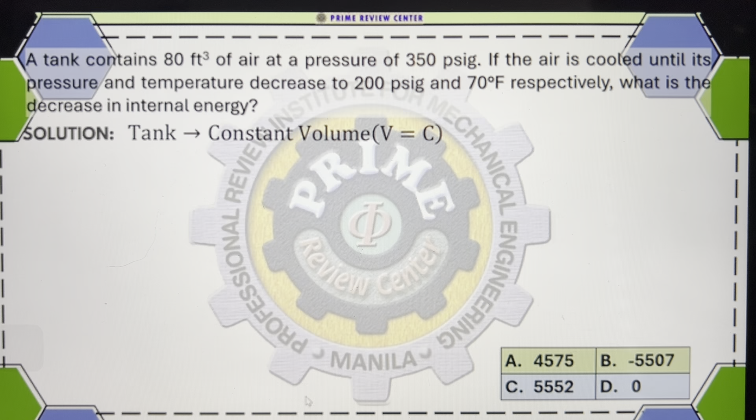So we need to find the decrease in the internal energy. How are we going to solve this? Let's recall our vessel. We have a tank, and since it's a tank, we can consider that as already a constant volume, right? If volume is constant, notice the problem gives two pressures and one temperature. Actually, the internal energy for a particular gas needs two temperatures to solve. So since only one temperature is given, along with another set of pressures, we can use the combined gas law to solve for the other temperature.

The combined gas law is P1V1 over T1 equals P2V2 over T2. Now since our system has constant volume, V1 and V2 cancel out, simplifying it to P1 over T1 equals P2 over T2, which is Charles's law.

So pressure is 350, which is gauge. The Charles's law formula needs absolute pressure, so we add 14.7. Similarly for the 200, divided by T1. Let's convert to Rankine, meaning we add 460. Then for T2, which is 70, we do the same, add 460.

So when we solve this, temperature 1 will already be in Fahrenheit, adding 460. Let's plug it in: we have 350 plus 14.7, divided by X plus 460. For all problems involving absolute temperature, it's not necessary to manually add the factor each time — for example here the 460 is just to make it absolute. When you shift-solve, you can just use X directly.

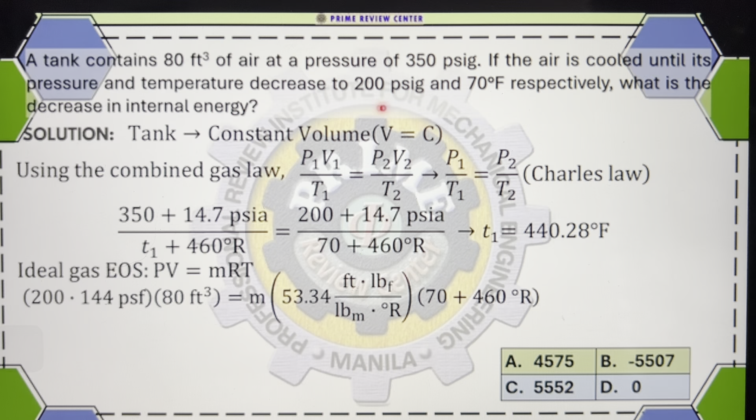So we need to find the mass. Our pressure is 200 psig, so we make it absolute — that should be plus 14.7. Since 200 psig is gauge, we convert it to absolute by adding 14.7.

So we have this times 144 to convert square inches to square feet. When you multiply PSI by 144, it automatically becomes pound per square foot, PSF. Times volume, that's 80 cubic feet, which cancels out our square foot. Then that's equivalent to mass times R, which is 53.34 for air, canceling out foot-pound — the foot and pound cancel out.

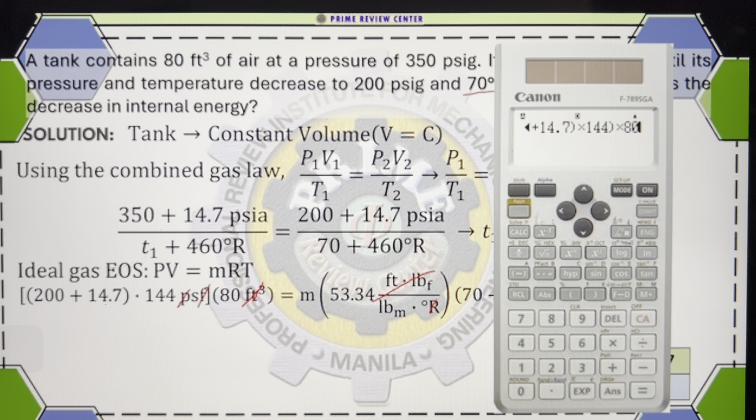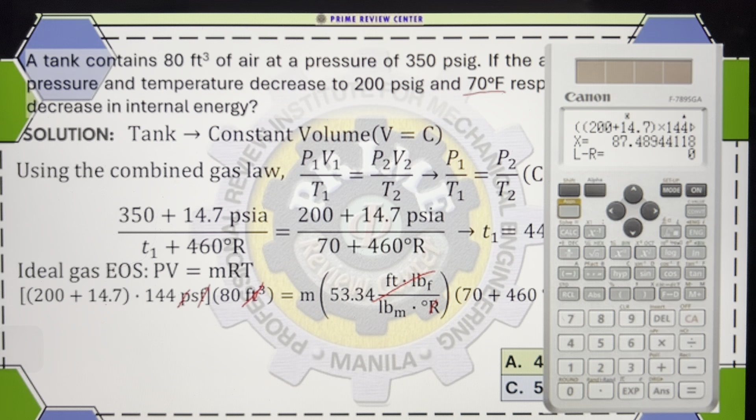Let's solve for the mass: that's 200 plus 14.7, multiplied by 144 times 80, equated to mass times 53.34 times the temperature, 70, made absolute. After setting that up, we shift-solve to get the mass value — our mass is equivalent to 87.49.

Now that we have the mass, we can find delta U, the change in internal energy. The change in internal energy is m times Cv times delta T. The mass is given, Cv is a constant, and delta T is the change in temperature — we have temperature 1 and temperature 2, so we just subtract directly.

Our mass is 87.49, Cv of air is 0.171 BTU per pound degree Fahrenheit. Then we have the initial temperature T1, that's 440.28 degrees Fahrenheit, and the degrees Fahrenheit and BTU units cancel out appropriately. So, the mass is 87.49, times 0.171, times the change in temperature, that is 70 minus 440.28. Pressing equals gives us the BTU value.

It is negative 5539.68. So the closest answer we get is letter B.

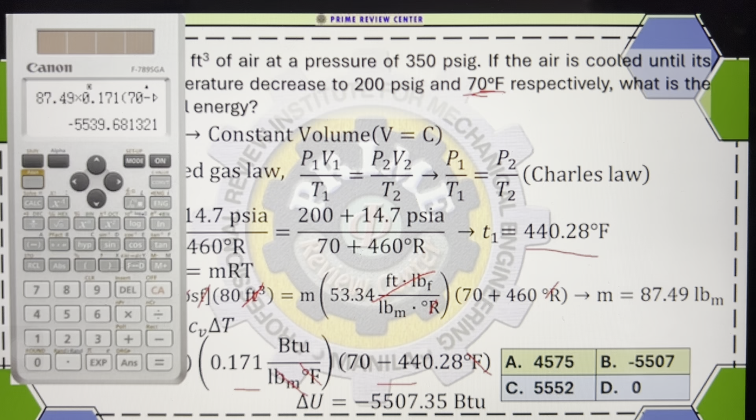Sige, so let us have another problem regarding sa ating power industrial plant. So, basahin ko lang. If 10 pounds of water evaporated at atmospheric pressure till a volume of 288.5 cubic feet is occupied, how much work is done?

So, kadalasan, pag nagpapa-evaporate tayo ng tubig, we are considering constant volume process, di ba? Kapag enclosed yung ating system, di ba? Pero kung open sa atmosphere yun, then that is constant pressure or isobaric. So, in this problem, how are we going to determine if that is constant volume or constant pressure?

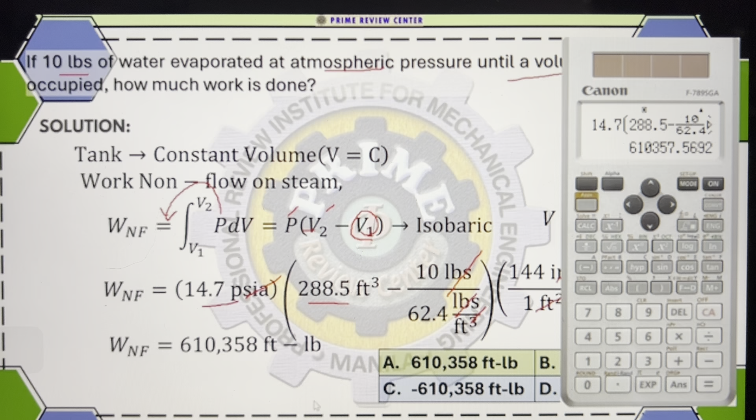So, meron tayong 14.7, times 288.5, minus 10 divided by 62.4, times 144. So, simply press equals, and that is equivalent to 610,358 foot-pound. So, yun yung letter A natin.